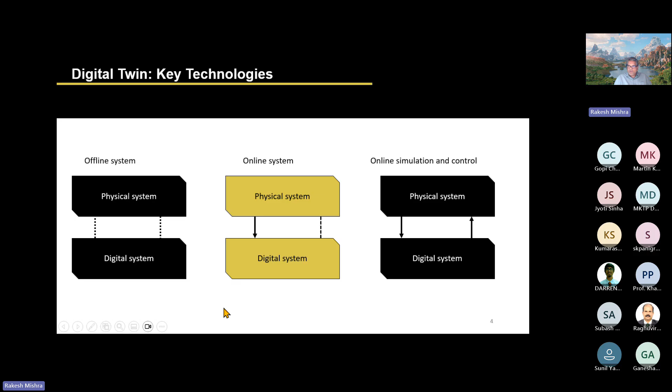So after this basic information, the smart house has been a cornerstone of our research activities in this particular domain. So I have taken the liberty of putting some information about the smart house. So please listen to it. I hope you can hear it.

We're not able to hear, I suppose. Are you not? No, we are able to hear you, but not the audio in the video. I think if you go to audio settings, you can say share my video sound. Okay, I'm not sure what I can do about this, but don't worry, I'll explain it verbally then. Is that okay? Yeah, that's okay. All right, go ahead. I'm not sure how else I can share the sound. Is there any other way I can do it? Okay, so

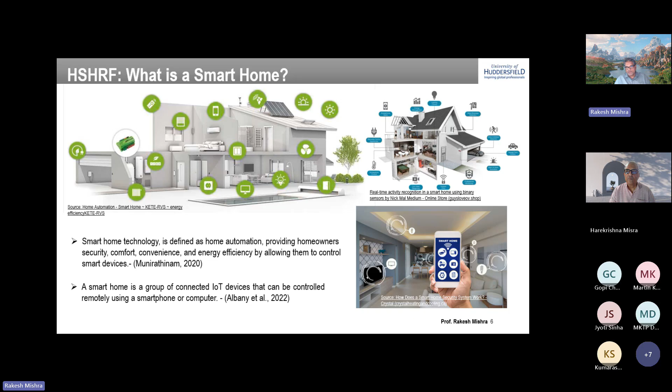But also, how do we support the aging population? Because of the complex needs that the aging population has, how can the smart house help us meet those requirements without putting too much strain on our medical or health systems.

Again, a different picture, so it is more interior. So this is the living area. This is the kitchen area. You can see we have a kitchen hood here. And this is designed to put different types of kitchen hood system and quantify the effect different types of kitchen hood designs may have on the extraction capability and the dispersion of particulates. So we are working with different kitchen companies, kitchen extraction companies on this area.

Again, the toilet and bath for different, like for example, for people with disability, how this can be modified so that it can be effectively used. Living area is normal living area, and then this is again the entrance of the smart house. Entrance is fairly important because outside also we have lots of sensors.

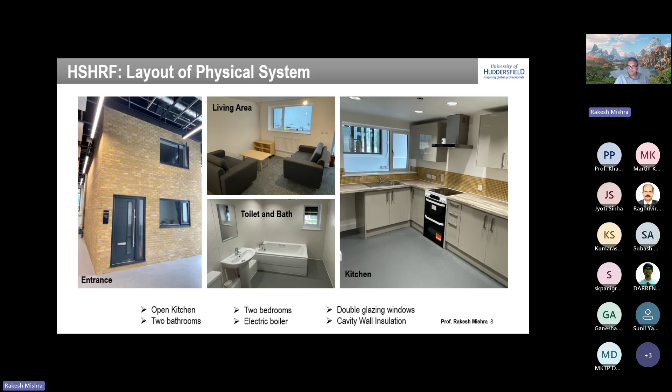So it has been in operation for 2-3 years, and I am very happy to say that we have been able to get more than £1 million in funding. So lots of work has gone on in terms of industrial funding. Lots of papers have come out. Lots of students are completing PhDs. So it is providing us strong support in developing funding bids. So we have applied for NIHR and EPSRC funding bids in this particular area also. Currently the work going on.

So you can see this one on the left here. There's a bed here. You can see some hanging wires here. These are thermocouples, and this work is done with a local radiator company. They make electric radiators. On the effectiveness of their radiators in warming the room, but what is the energy consumption that radiator is having. So we can suggest to them how many radiators to put, what will be the shape and size, and other details.

We are also working with a mattress company on developing mattresses that are not only providing comfort while sleeping, but also work as a diagnostic tool for the patient's health. So that work is also currently ongoing. Apart from that, we are working with a water monitoring system, a system that predicts or informs in real time if there's a small leak taking place.

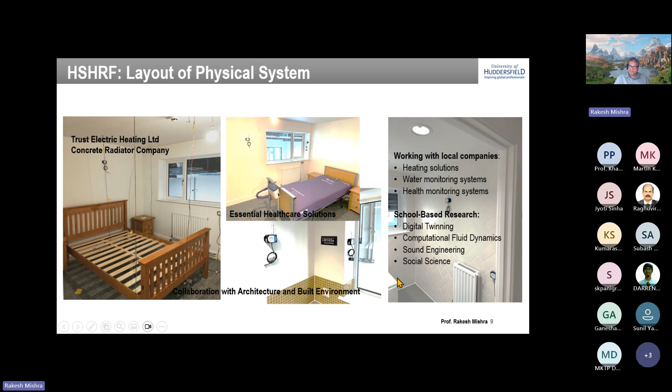And we are also currently working with some health monitoring companies where we are trying to finalize the arrangements with a health monitoring system. So we have lots of activities in the area of digital twinning, computational fluid dynamics, sound and acoustic engineering, and social sciences. So it's quite a successful venture that we had, and I think it's going from strength to strength as we move forward.

So now coming to the cyber physical system. So that is the physical system we had, the smart house with sensors. But then what are we doing with those sensors? So as you can see here, all these sensors, about 80 plus sensors we have put, as you can see here. And all these sensors, right from motion sensor to temperature, humidity,

CO2, PM 2.5, VOC, and all these sensors are giving data to a wireless gateway, and from the wireless gateway we take this data to a cloud-based server, and from this cloud-based server we can take the data to our systems for further analysis.

Now what you're seeing here on the top left is another system that tells us about the thermal comfort, and it uses two parameters, predicted mean vote and PPD. I'm missing the full name of the PPD, something percent. And then we have the motion sensor, and not only that, we have instrumented the central heating system, so in real time we can mimic or predict what is happening in the central heating system at which particular point.

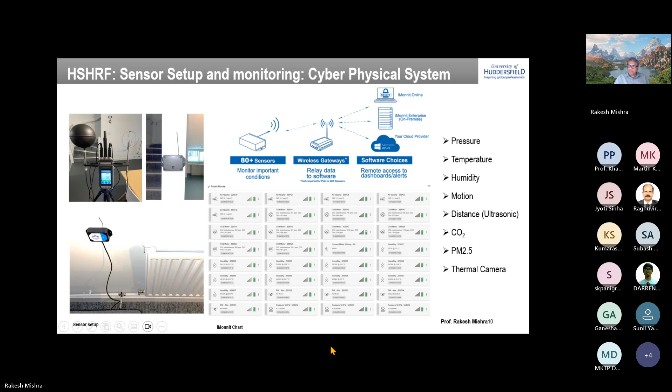Just an example of how it is working. So as you can see, the top one is the temperature line, the middle one is the humidity line, and the last one is the motion sensor. So we have put motion sensors near the door. So someone entering the smart house will leave a digital imprint through the motion sensor, and we can see how many people have entered, when, and all that. And then in real time, we can also see nearby how the temperature and humidity are changing.

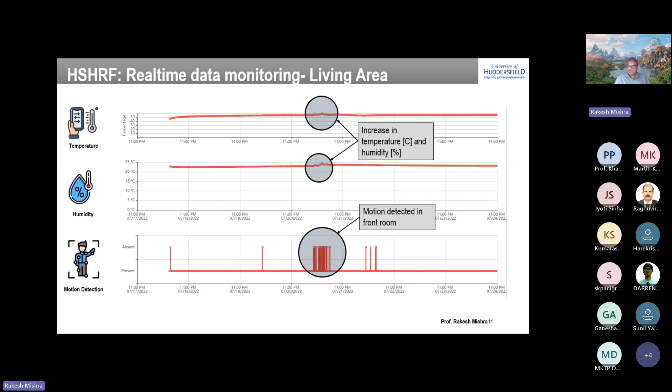So what I'm simply suggesting here is that we can see how human behavior, human motion or human presence affects the temperature and humidity. And this work we want to extend further to quantify. We also can see the motion in the kitchen area, and then we can see an increase in CO2. So human activity is increasing the carbon dioxide. And we all know that if carbon dioxide concentration goes above 800 ppm, it may start to affect the experiences or the feel that we have.

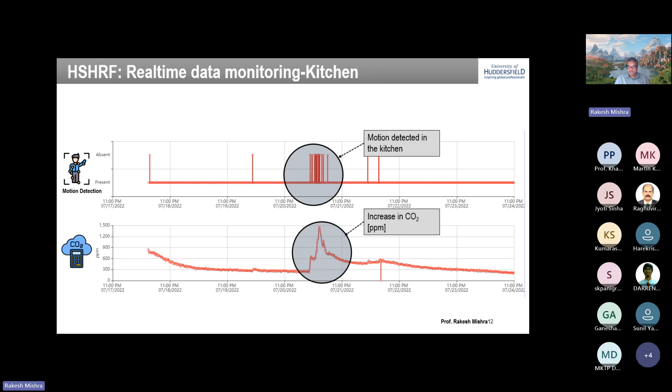So just an indication of testing the sensor system and how the sensor system is behaving. Is it accurate, and can it be relied on for further analysis? Again, then particulate matter 2.5. Actually, particulate matter is one of the most important variables that need to be monitored, because as the particle size becomes smaller and smaller, especially in this area, 2.5 micron or something,

once they go to the lungs, it becomes very difficult to sneeze them out. So if there are bigger size particles, you can sneeze them out, but smaller size particles do affect the lung capacity, because once they are in there, they don't come out. So it is very, very important to monitor the particulate concentration. And again, how human behavior and human action around it is affecting it, we can correlate the two.

Okay, so that is the physical system that we had and the cyber physical system. And we wanted to add more software power to it. So what we did was we included the simulation capability alongside our cyber physical system. So in our cyber system, we had this simulation capability, and then we also included controls in terms of lighting, ventilation, and access capabilities inside.

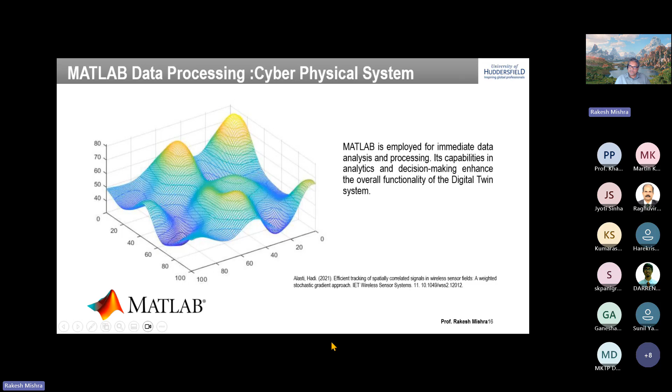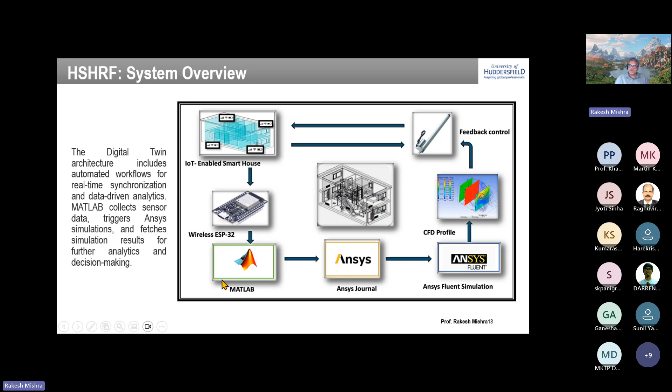And we used ANSYS Fluent as the computer system, which could in real time, almost real time, predict what was happening inside the smart house. And then we calculated the thermal comfort. And based on that, we used a controller that controlled the opening of a window to maintain a particular condition inside the smart house. If that condition is not met, it will keep on changing the window opening condition till that condition has been met. So this is a general framework of the digital twin that we have created.

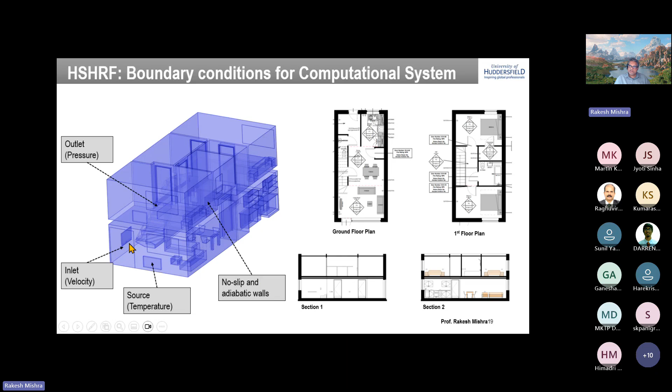So we used, like, where is the airflow coming from? Is there a radiator? How is its temperature changing? What is the behavior of the walls? What is the U value? And how is the air going out? So we defined inlet and outlet. We defined any sources, and we also defined the conditions at the wall before we went into the analysis domain.

And then we checked it. Are we getting the real data? The data that sounds reasonable? And we could check that, okay, fine, the air distribution, the temperature distribution seems like what has been observed by others. So this increased our confidence in the simulation methods that we had.

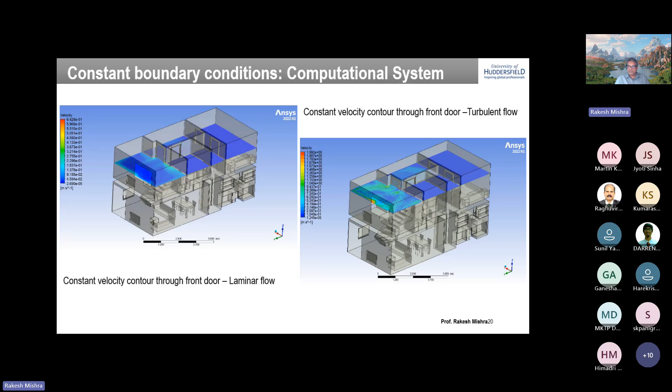So this is simply the flow from the inlet, a constant flow. But then again, we simulated the opening and closing of the doors, based on the motion sensor data, and tried to see whether we can simulate any dynamic situation, for example, a person going in or coming out.

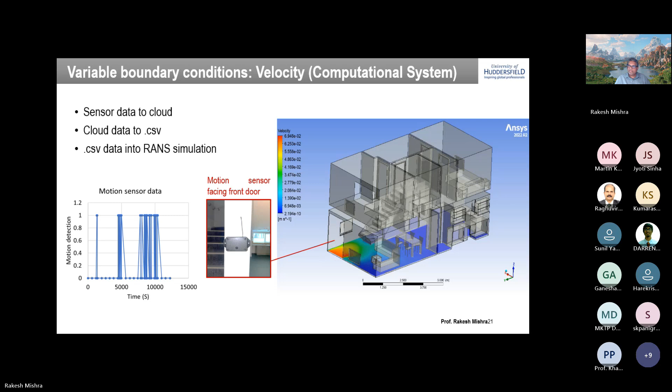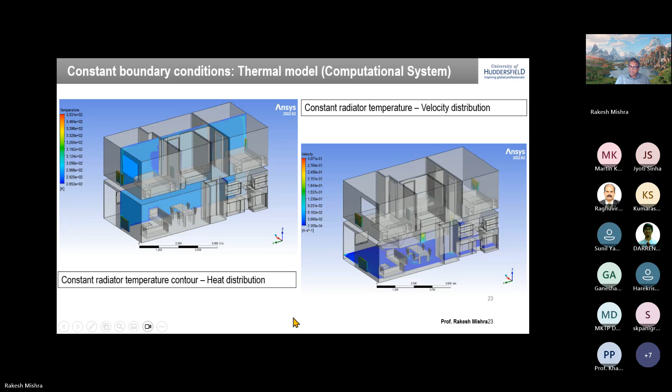So again, we worked on the effect of heating on the temperature distribution, but also on the velocity distribution in terms of the buoyancy effects. So once we had perfected this, then we put variable conditions on the radiator and tried to map the temperature distribution on the radiator.

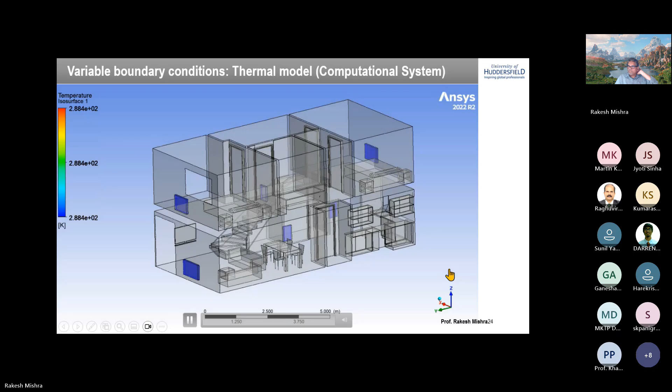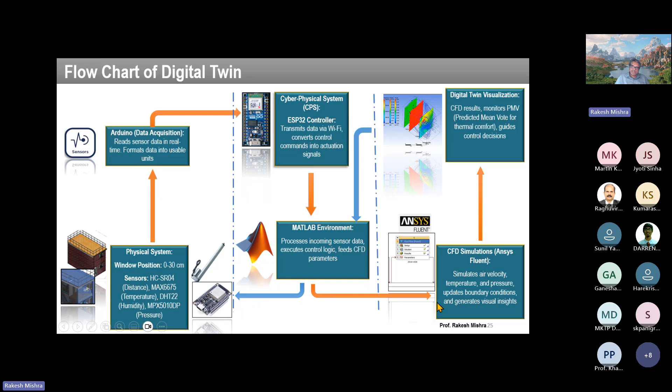So this is the physical system, this is the cyber physical system, and this is our computer system, three distinct zones, and we managed all this through the MATLAB environment.

Now I'll demonstrate the operation of digital twin. Some of you may be seeing it for the first time. It doesn't have sound, although I think one of my PhD students put some music behind it. So you may not be able to hear the music, but you will be able to see how a smart house with digital twin operated to achieve a PMV value.

So there is an initial window opening, we calculate PMV, we see whether PMV is at a particular value or not. If not, then it will change the opening of the window. It will keep on doing this continuously till we meet the requirement. There are subtitles in there, so you can read that. I don't think it requires any direct intervention from me, but at the end, if it's needed, I can always explain that.

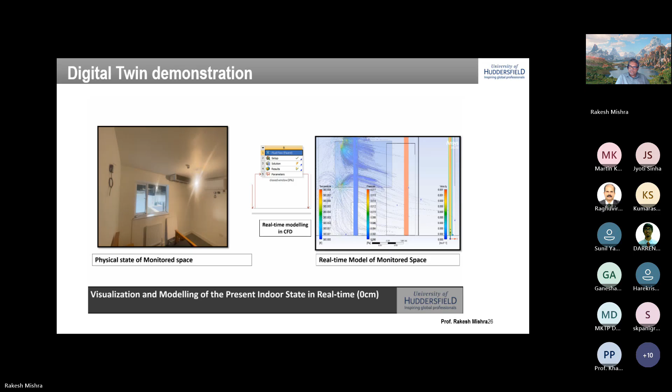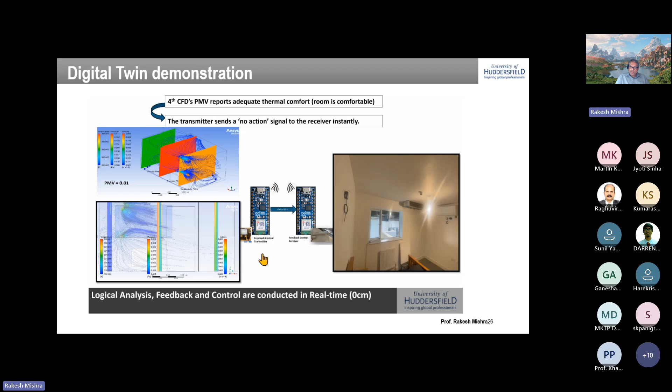So it's a quick demonstration for how digital twin worked in that case. And finally, at 0 centimeter, we found that PMV is adequate, and there is no more intervention needed. So this is just a simple demonstration of how digital twin can be used, can be made. And we have done similar work in other physical assets.

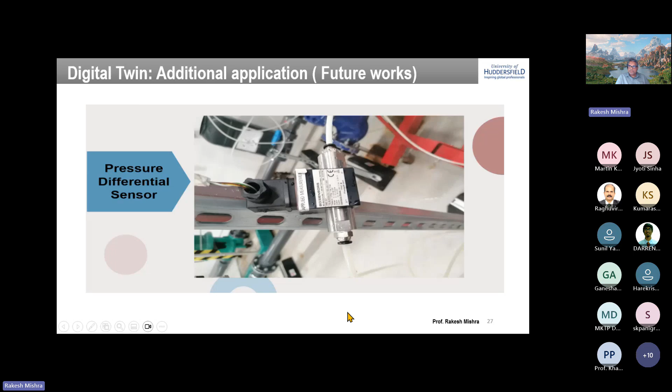We have also created a digital twin of a control valve, in which we have a valve provided by a local company, and we put sensors around it. And in real time, we can see performance of the valve, and we can embed data analytics inside to see whether the valve is performing correctly or not, or if it is not performing correctly, what may be the problems. So we have used exactly the same principle.

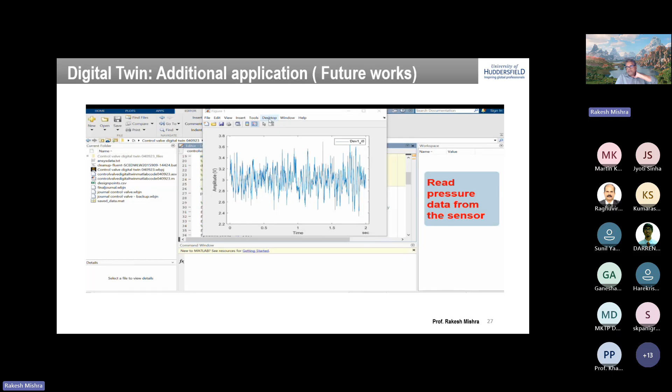So this technology can be used in almost all spheres of process industries. People are using it for the infrastructure industry also; lots of work is going on in roads, buildings, critical infrastructure, to see in real time how things are happening. But in terms of mechanical industries or chemical industries, we can work with valves, pumps, pipes, turbines. We can create digital twinning of all such systems.

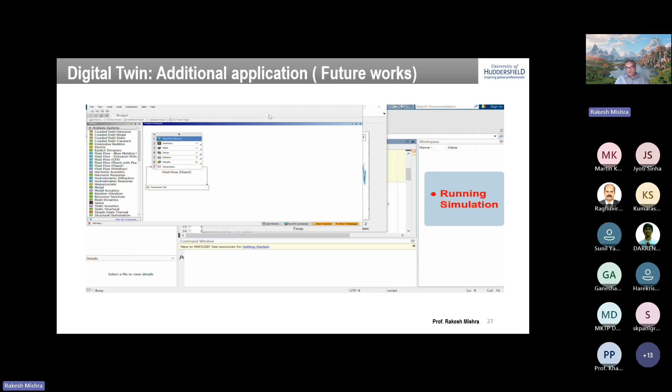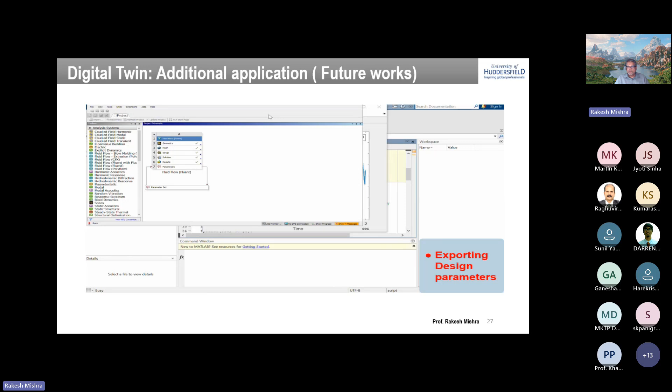And lots of activities are currently ongoing. We are doing our bit in some of the areas where we are working. So from a smart house to control valve to wind turbines, we have been fairly active in this particular area. And it's very good that now we have demonstrators for a smart house and the valve in our lab. You are more than welcome to come and visit us and see how these systems work.

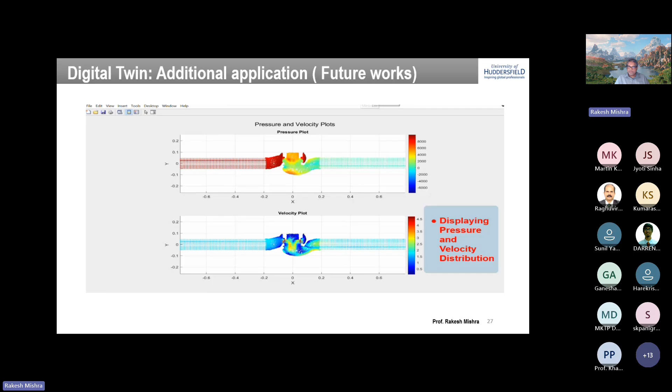If there are opportunities for collaborating with industries and academic institutions, I'll be very happy to collaborate in these areas and support further development. So thank you very much for listening to me patiently. I'm very happy to answer any questions that you may have. Thank you.

Thank you, Professor Rakesh. It's a wonderful presentation as always. I'm very happy that some of my students are very much interested to know about it, and some of them have joined also. So I'd be looking forward to getting your involvement with some of our students' activities. We may be coming to it later on. Thank you very much for this lecture. Thank you. No problem. Thank you.

I'd just like to say thank you very much for that, Professor Mishra. What was refreshing for me, in Australia at least, we spent a lot of time in digital engineering and BIM, and unfortunately it only gets value during design and construct, and then all of a sudden you're left with a model that isn't really usable. But I really appreciated what you showed today, how you can bring it together in a living, breathing system. I'll take a lot of these principles back to my colleagues, to look beyond just the BIM and at a system point of view. So thank you very much.